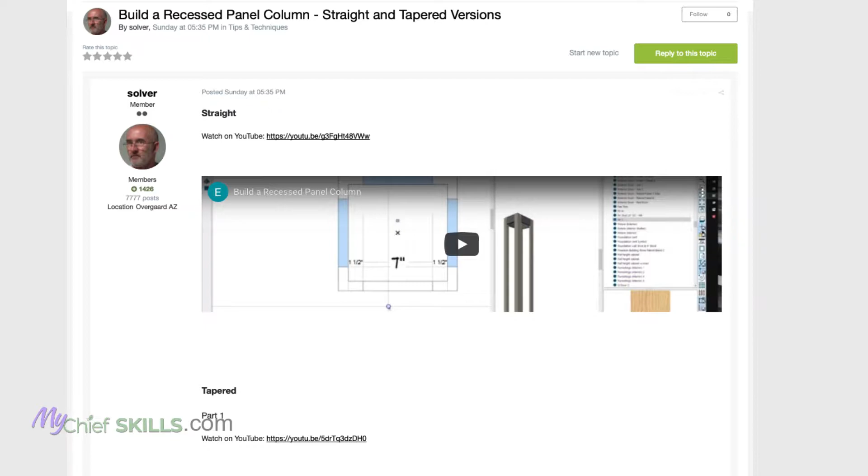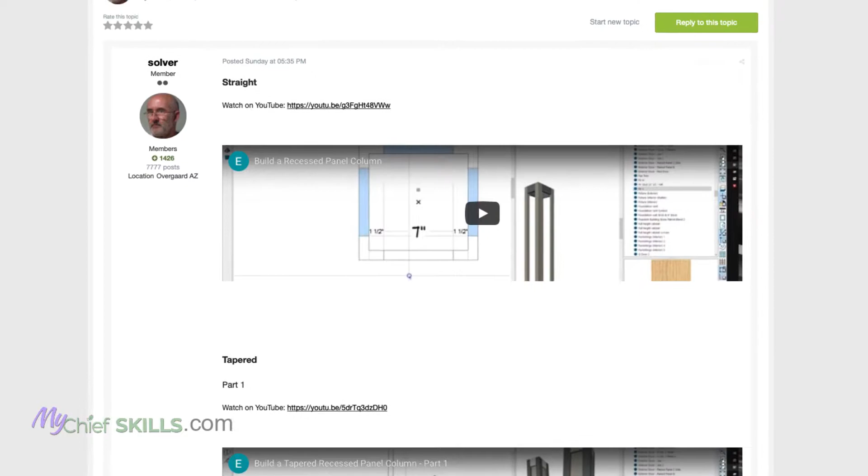Hey, this is Steve at Chiefskills, and I'm going to piggyback off what Eric has done here. He posted recent videos on Chief Talk about building a recessed panel column using solids and different modeling techniques, creating tapered columns with trim boards. It was well explained, but I thought there's got to be an easier way. So I'm going to show you a different technique using a symbol that gets to the same end result, but a little different, and I think a little quicker. Let's take a look, and you can be the judge.

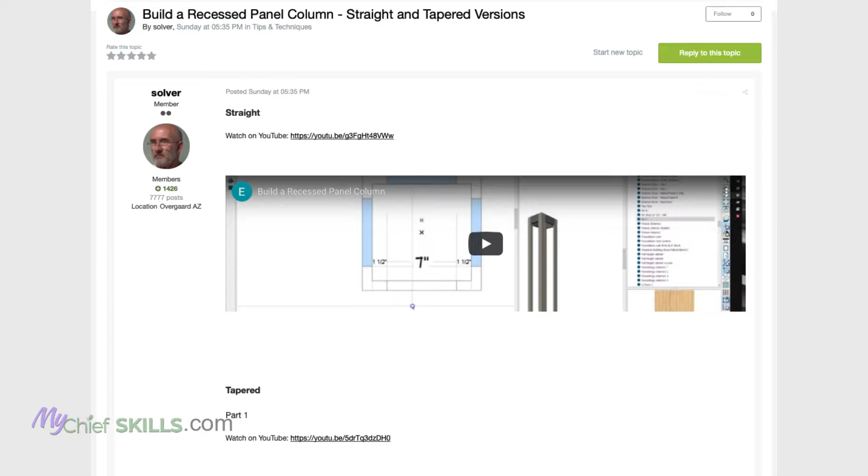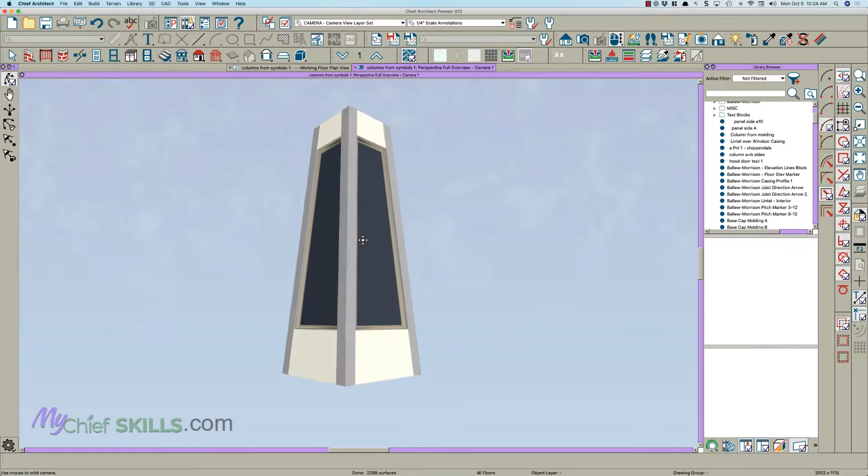Hey there, everybody, it's Steve at Chiefskills, and today I'm going to show you how to make this column using just two symbols, basically made from polyline solids and a molding polyline. It's a fast way to make a tapered panel column, and it works great, looks great, and gives you lots of flexibility. So let's get started and I'll show you how to do it.

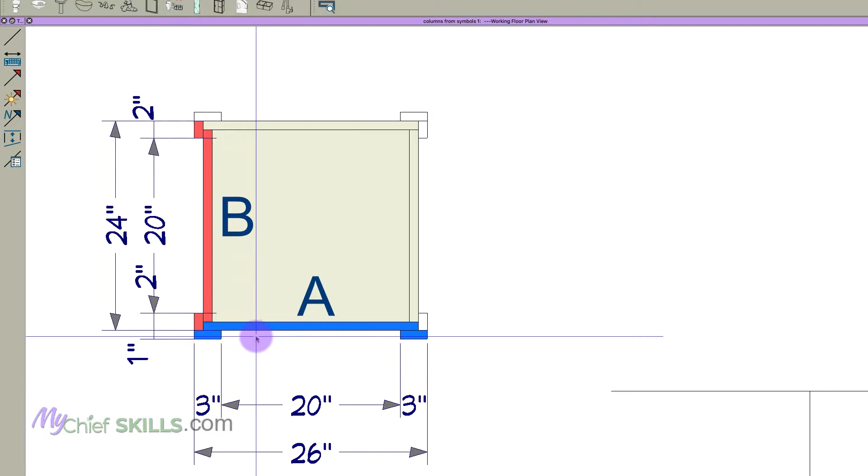First we need to understand how this is going to be built. This area colored in light green is 2 foot square, and that's the base of our column. But to get the trim to line up, we need a panel that's 24 inches, and the trim extends beyond that by 1 inch, making it overall 26. That's panel A. For panel B, the trim is only 2 inches wide, so 2 plus 1 is 3, making it look like 3 inches all the way around, and this panel is only 24 inches wide. With those two panels, we can make the column.

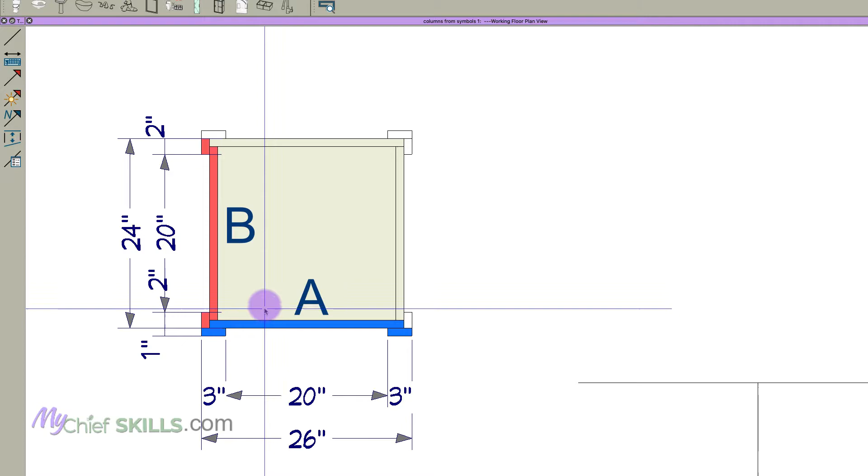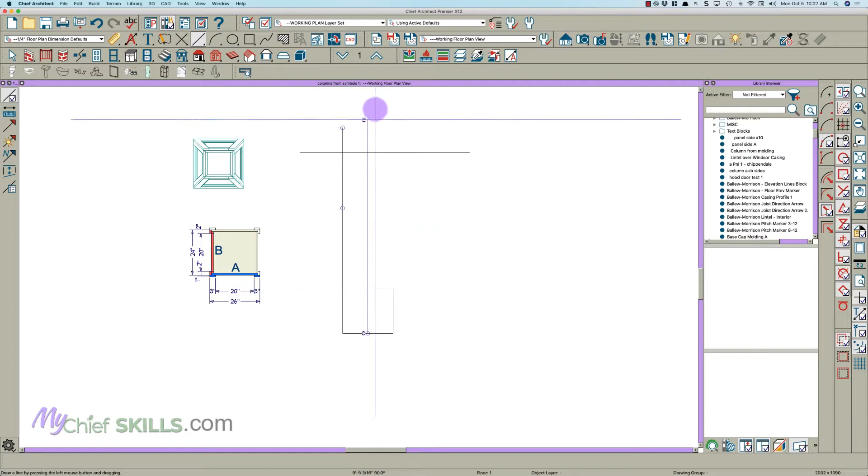I've set up a drawing here, and this is 6 feet tall for our column. This little polyline is 2 foot 2, which is 26 inches. First I'll draw a line here, and another line off the center of this polyline. Then on this line, I'll open it and change the angle to 86 degrees, which is our side angle of the column. Then I'll copy that and reflect it about this center, and that's our basic shape.

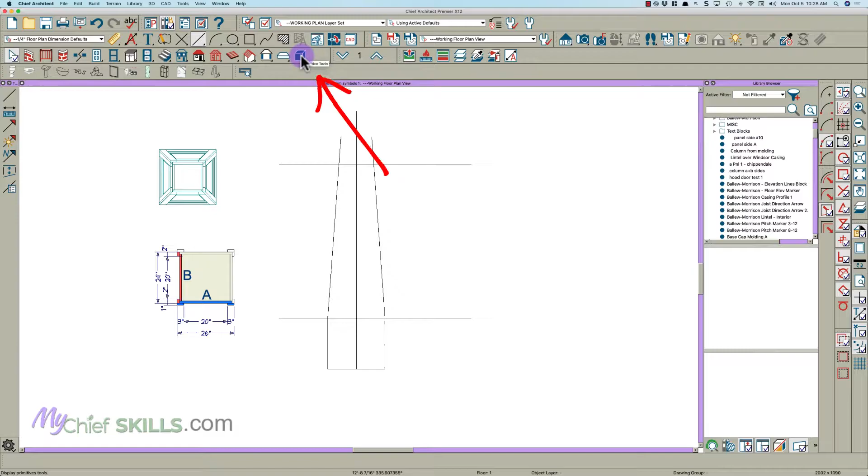Then I'll get this solids tool, the primitive tool, and use a slab basically, draw this and pull it in like that. If you double click on it, you can see it's 1 inch thick and the bottom is at 0, and that is this panel right there.

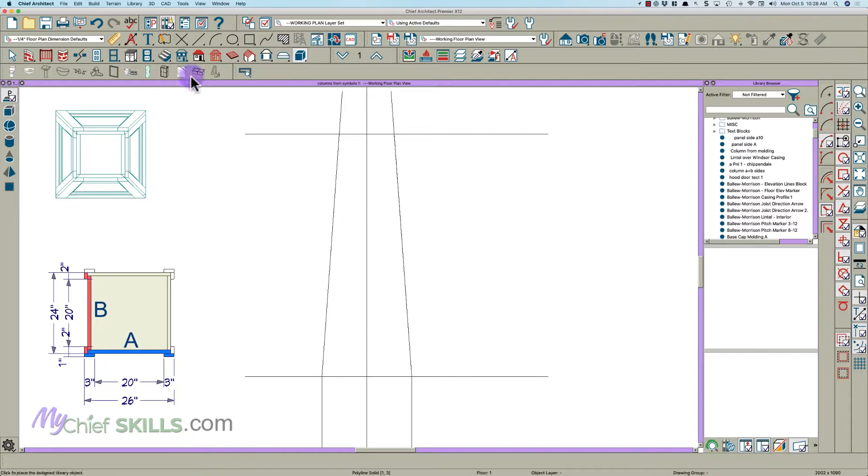That's what we're making. Next I'll make the trim pieces using the same slab tool. I'll click right here, and I'm actually going to extend it a little bit, saying 3 inches, like that.

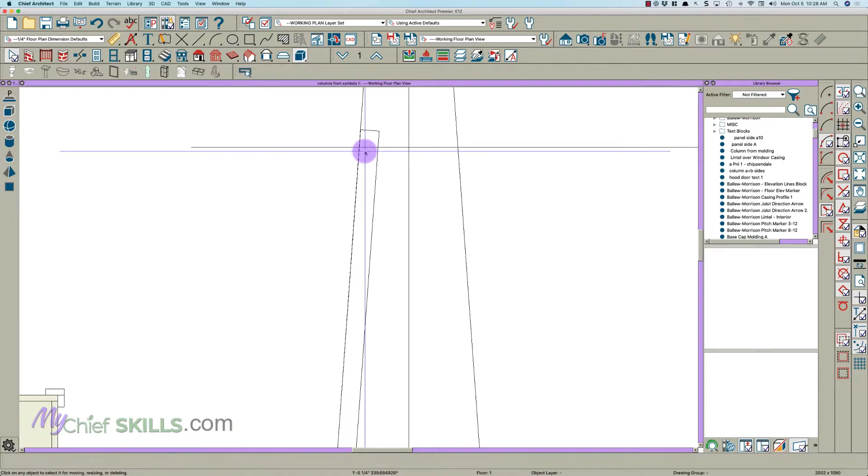Then I'll double click this little parallel tool and rotate the entire polyline, picking up this line. Then I'll pick up this corner and snap it right there, pull this down, turn my temporary dimensions off for a second, and snap to the nearest corner, then pull this one down. Then I'll do the same here, snapping to this nearest corner and pulling this up.

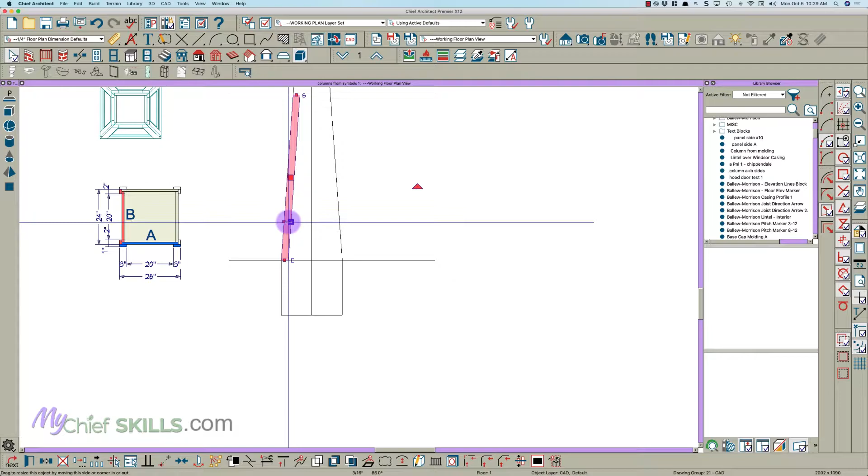Then, very simply, I'll open this and make sure the bottom of this piece is at 1, so it sits on top of this piece. Then I'll click it, copy it, and reflect it about right there.

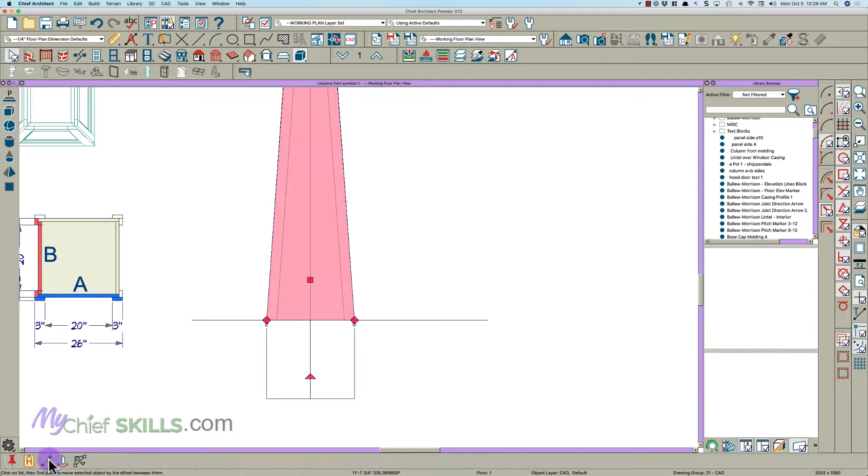Then we need to make these base pieces. I'm going to copy this big panel and paste, hold position. Then open that while it's still selected and raise it so the bottom is at 1. I'm just going to pull this down like this, turn on my temporary dimensions, and make this 12 inches. You can be as specific as you want with your dimensions. I'm just making this so it looks halfway decent.

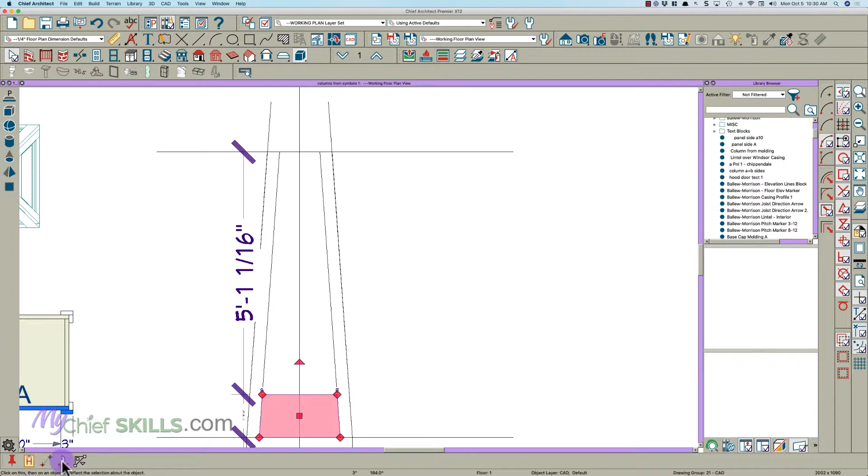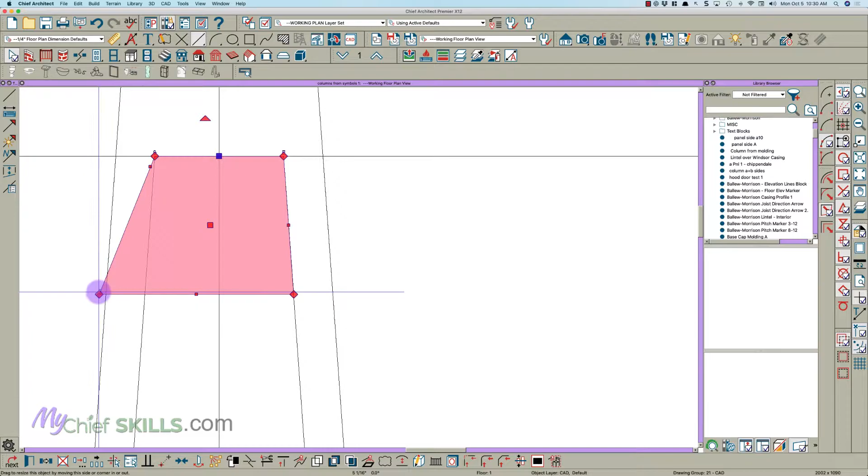Then I'm going to copy this and reflect it about. Oh, I need a line, so I'm going to draw a line right here in the middle. Copy and reflect about right there. And then just manipulate this and pull it together right there. I'm going to turn my temporary dimensions off. And there you have it.

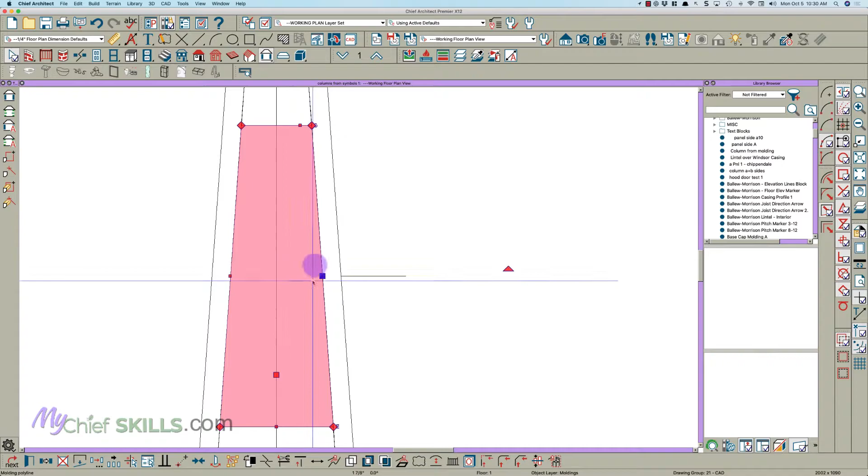Now the only thing we're missing is this molding in the middle, and for that I'm going to use a molding polyline. This is the number one reason why I like to draw these things in plan view, because this molding polyline tool is so much easier to use than the 3D molding polyline. So I'm going to open that and make sure it's set at 1 inch so it's sitting on the surface of our main panel.

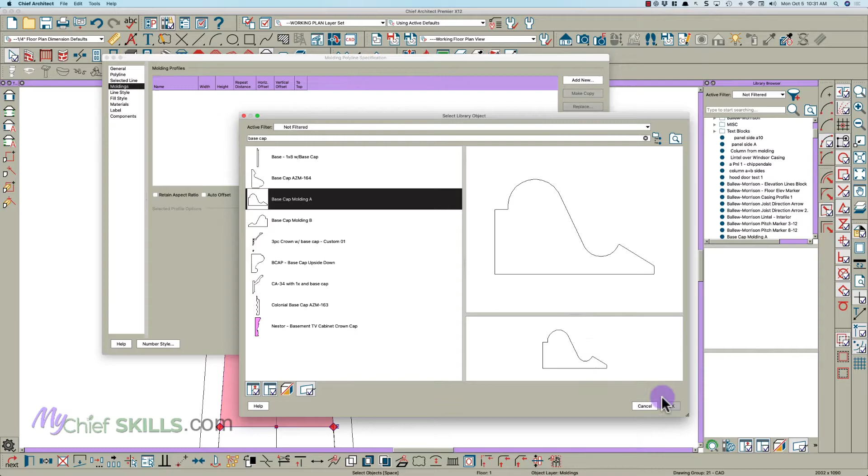Then add new, and I'm going to choose a base cap. I know I have this in here because I've done this before, but I have the basic base cap and I've made copies of it so it's laying in different directions. This is the one I want so that the back edge is against this, and extrude inside is what I want. So there's our first panel A, let's just take a look at it.

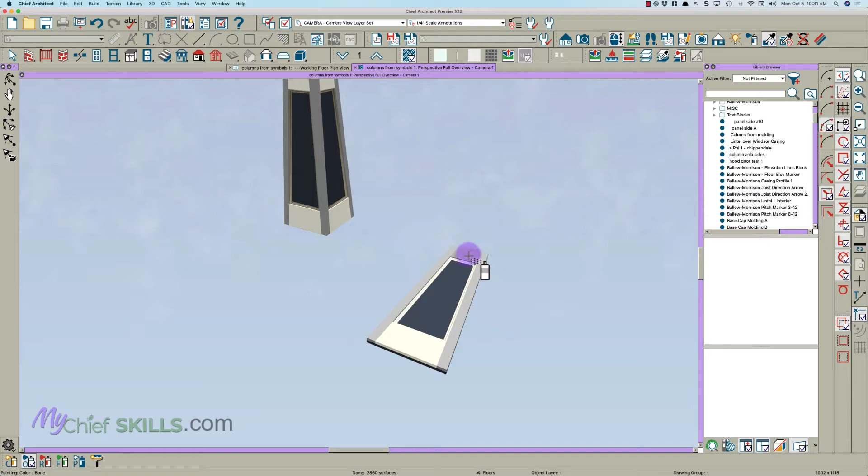It's all these concrete materials, so we're just going to paint them in different colors so you have some ability to change the texture of all these things, especially these 4 pieces right here. If you paint everything a different color, it gives you flexibility later on when you're placing this symbol in your plan. So there's our panel.

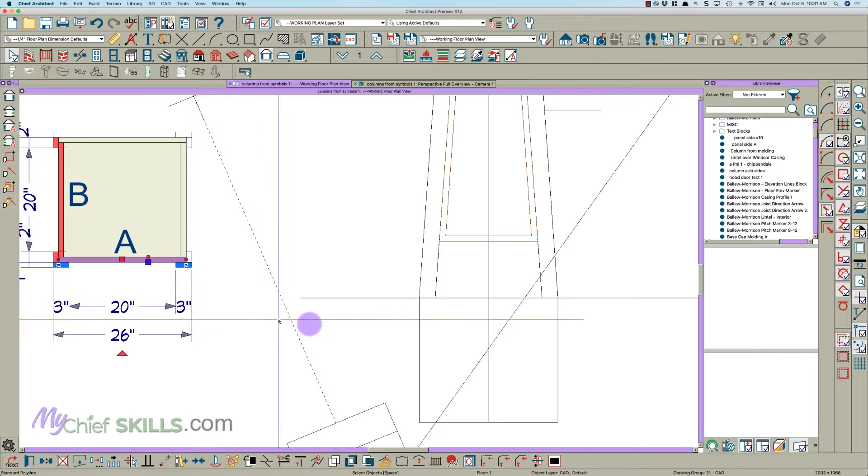Now there's one more little thing we have to do to it, and that is the panel itself right here is only 24. So I'm actually going to change the length of this to 24 and center it on the main panel here. Then I'm going to click here and get this main panel, turn my temporary dimensions off, and snap it right to that corner and right to that corner right there. And that is our first panel, side A.

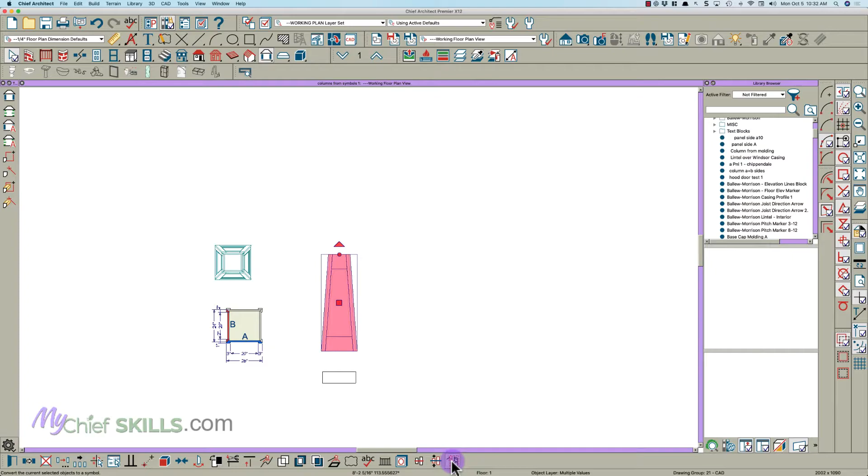I'm going to get rid of this camera, get rid of these polylines, we don't need them anymore. Then select this and hit the little chair stool right here, and panel side A, I'm going to put 100 because I've made a few of these testing things. Make sure it's a fixture exterior and say OK.

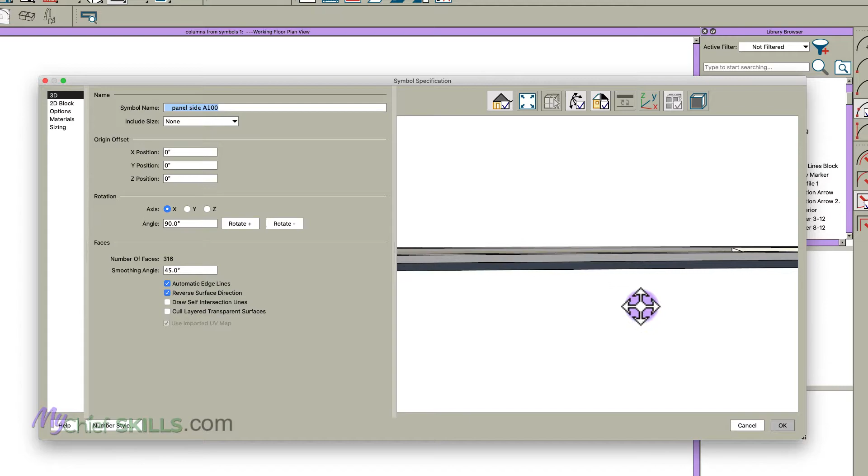And here's the secret to this whole thing: we have to rotate this. It's sitting flat on the floor right now in plan view. We need to stand it up, and we're going to stand it up 90 degrees just like the sides we made. If you look at that now, you'll see that it is standing and leaning, which is what we want.

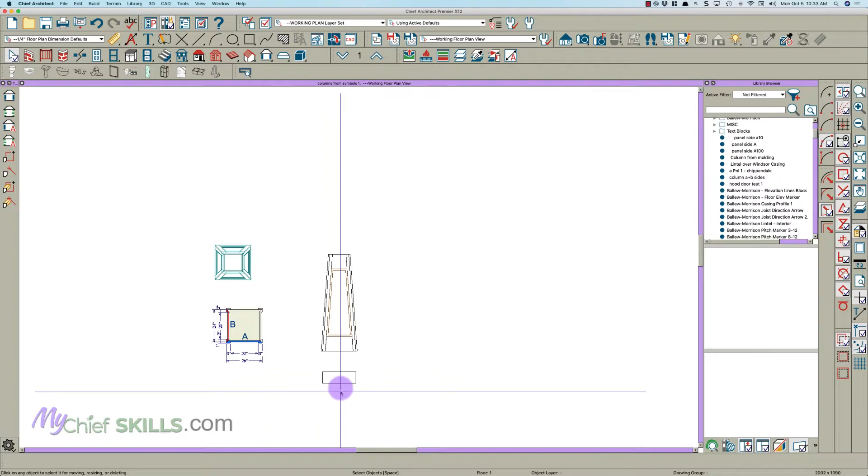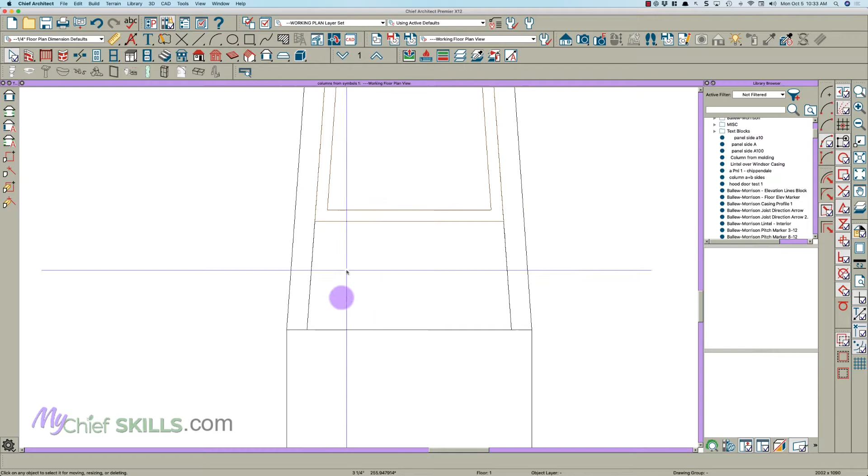Click OK. All right, now we need to make panel side B, and panel side B is just this dimension. It's actually 24 inches to the trim, okay, which is what this polyline is. So what we're going to do is take this trim piece right here and just pull it back until it snaps right there.

The only other modification we need to make is we're going to make this 22 inches and center it on the main panel. Then click our main panel and snap it to those corners. I've turned my temporary dimensions off so I can do this, and snap it there. And then that panel is ready, that's panel side B. So let's select this.

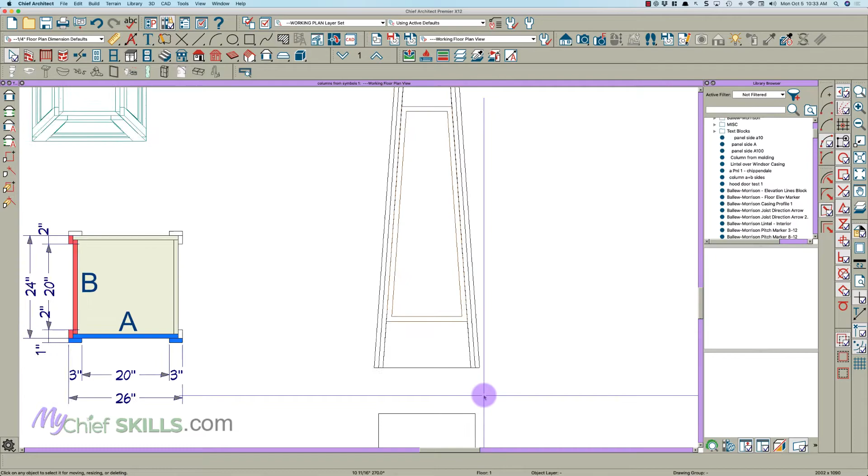Open this and panel side B100. Panel side. Okay.

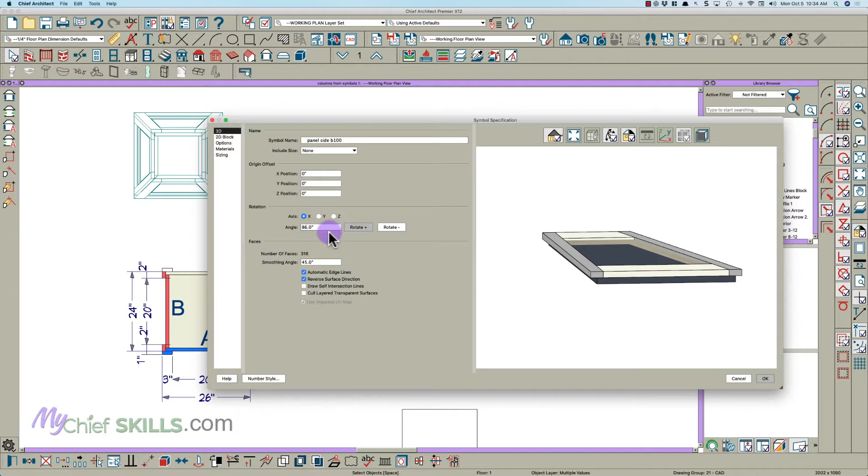And again, we have to rotate it 90 degrees on the x-axis. And that's all we need to do. Now we have A and B, so we can make our column.

So we're going to pull in panel side A 100 and rotate that around this way. And then panel side B, rotate it around vertical.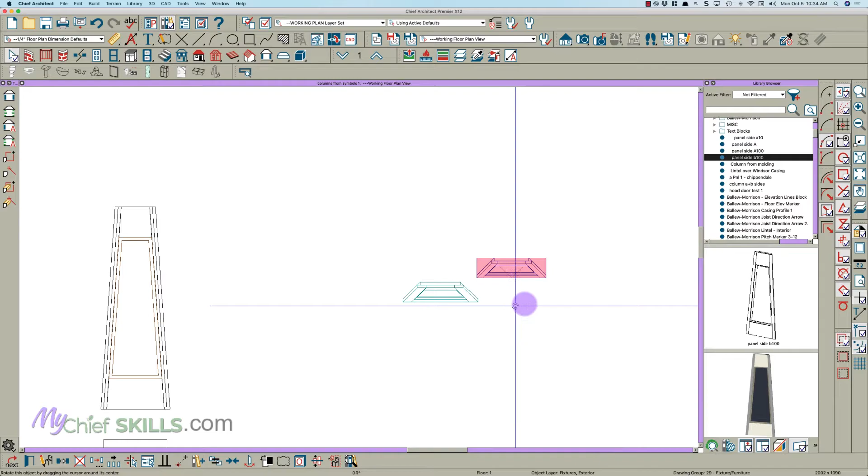And we need to snap these together, but how do you do that? Because you can't really do it like this. So I am going to...

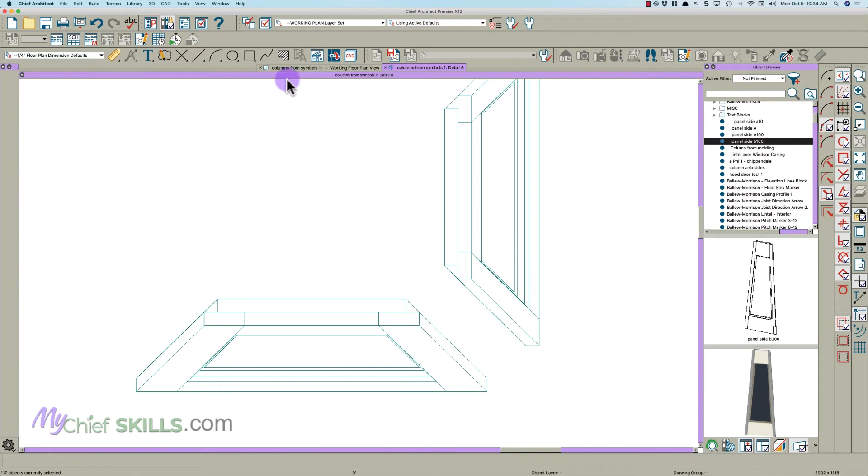Do a CAD detail from view, and then explode these 2 blocks. And then I like to use this point tool, and what we want to do is we want this corner to sit right there into this corner. So I'm going to put one there and one here.

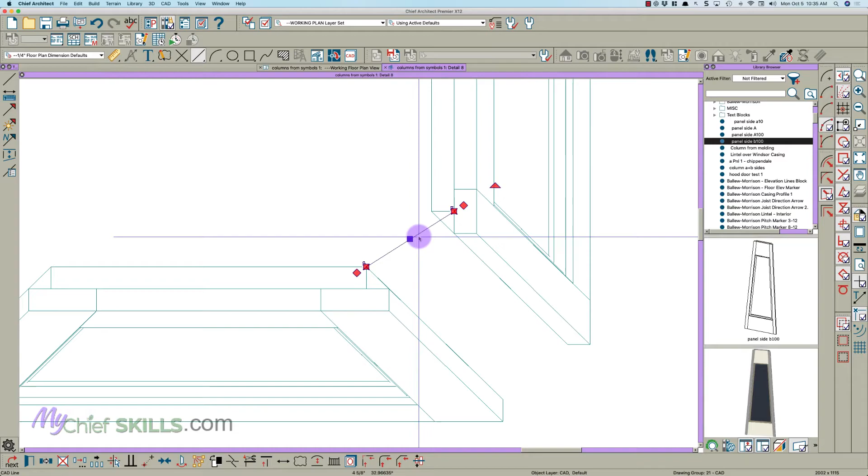Then I'm going to draw a line between the two, if I can get it to snap right there. Go Control C, go back to the floor plan, Control Alt V. Now we have snap points, and we can move it with point to point right there.

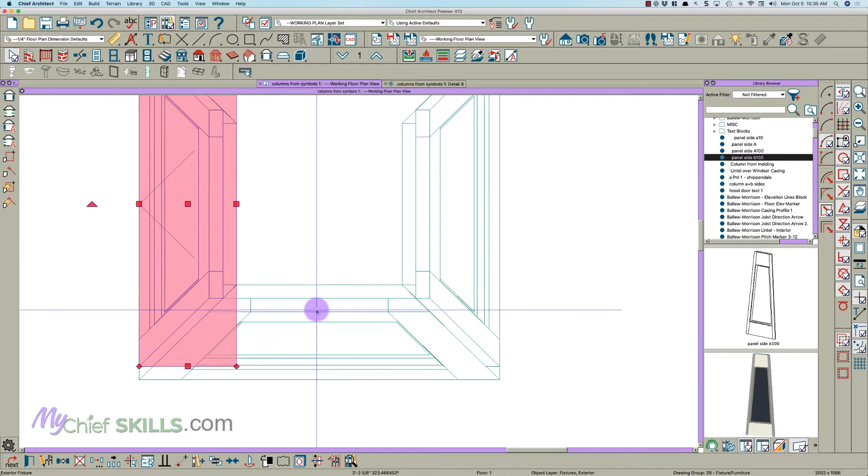And we can get rid of this line. And then we just copy this and reflect it about. And we copy this and reflect it about.

There's actually another way you can join these columns without using that point-to-point method, and I wanted to show you that. So let's pull in side A and pull in side B, and then just make a polyline right here and make it 26 inches square, 26 by 26 right here.

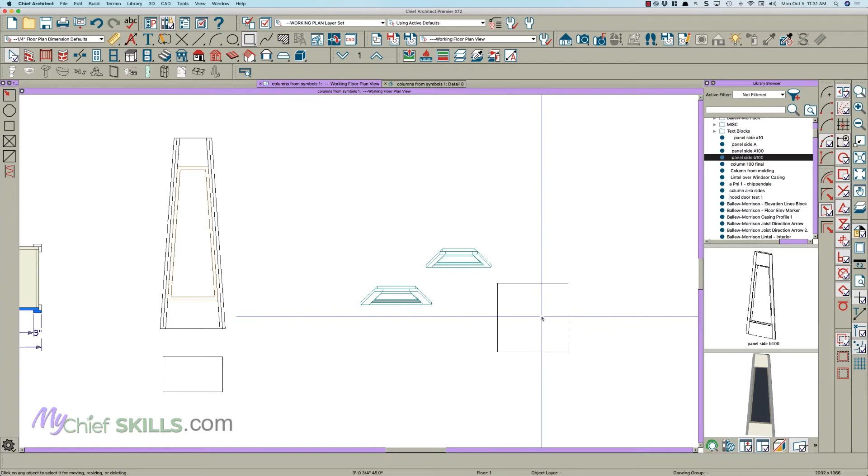Come on, hit enter. And then what we can do is take this, hit Control G, and center it right here. Then use point to point and pull this one right here down to there. And then let's just rotate this and use point to point and put it right here in the middle.

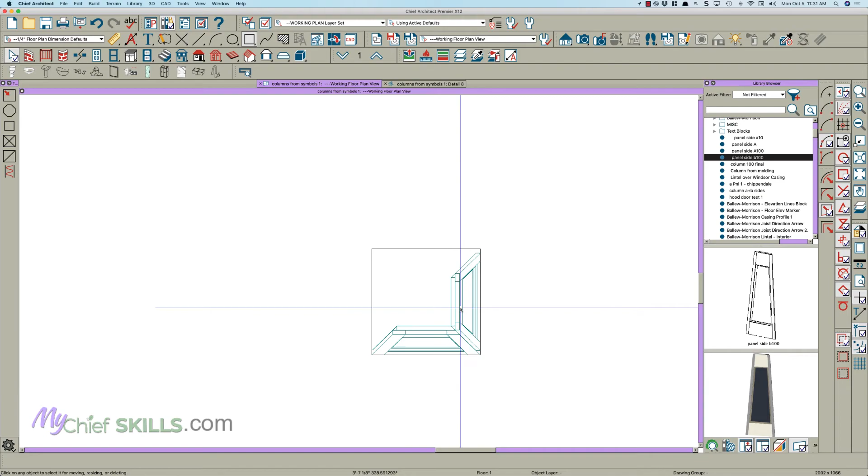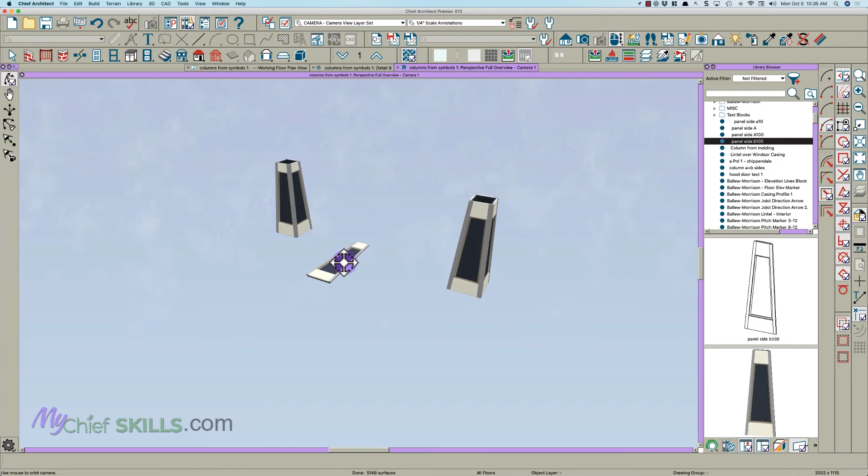And then just copy and reflect about right here, and copy and reflect about right here. And since we just put them right here to our 26 by 26, we will have our column right here. And then we take a look and we should have a column, and we do right here. All done, paneled tapered column.

Easy peasy, as they would say. And then if you want to make a column, you just click these 4 sections.

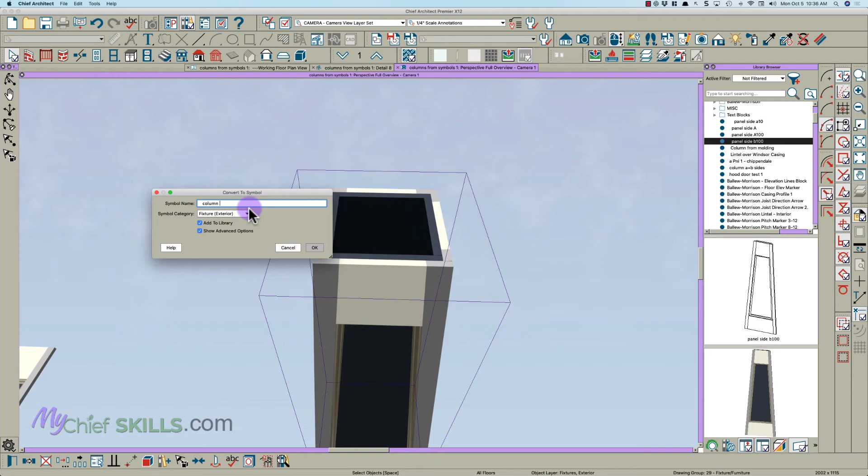Grab this little stool symbol and make a symbol, and let's call it column 100 final. And making it a fixture exterior, and then go here.

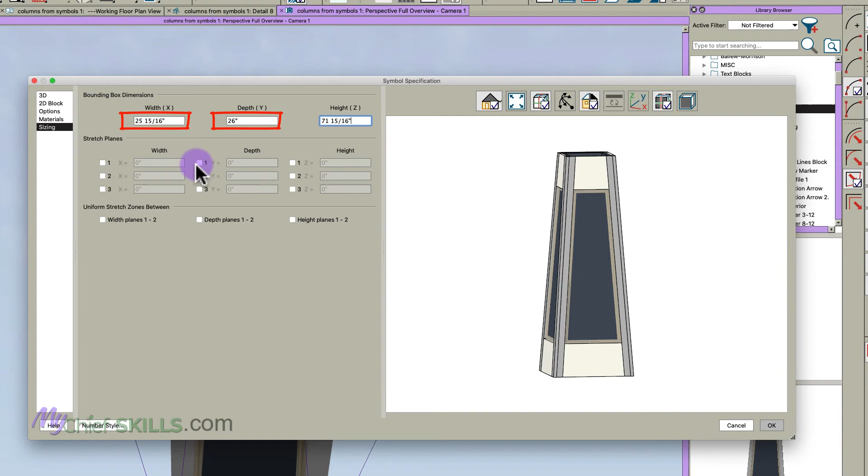And really the only thing we need to mess with is the sizing. And as you can see, it's a 1/16 of an inch off from square, and just slightly off on the height. I don't know, it's an anomaly in Chief. I'm not sure why it happens, but we'll just click there and make that 0, which you can see where that would be. Here we'll go -13.

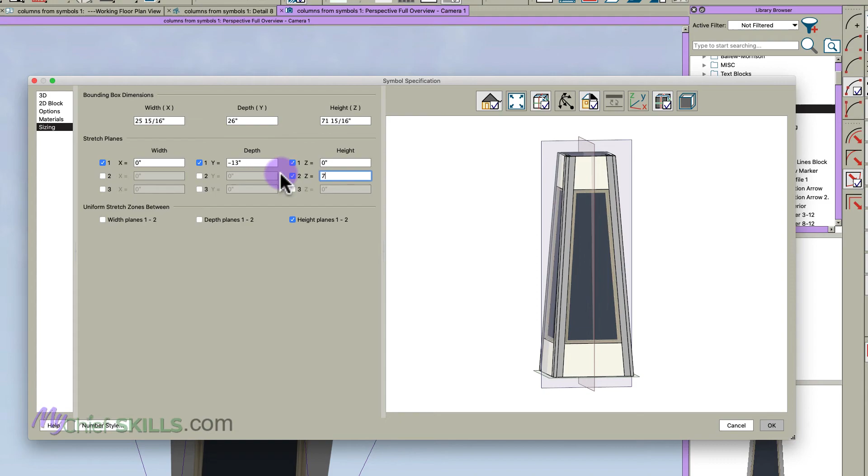And then on the height, we're going to have equal height planes from 0 to 72, say. Okay, and then we will have our symbol panel column, and we can place that wherever we want.

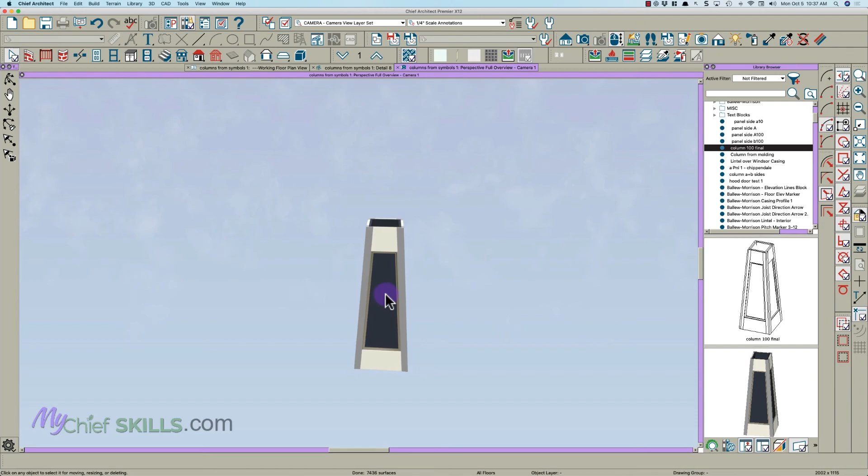Let's place it over here. Let's turn this around so it's facing that. And just look at this, and there you go. That's a symbol, and we can stretch it and make it look right.

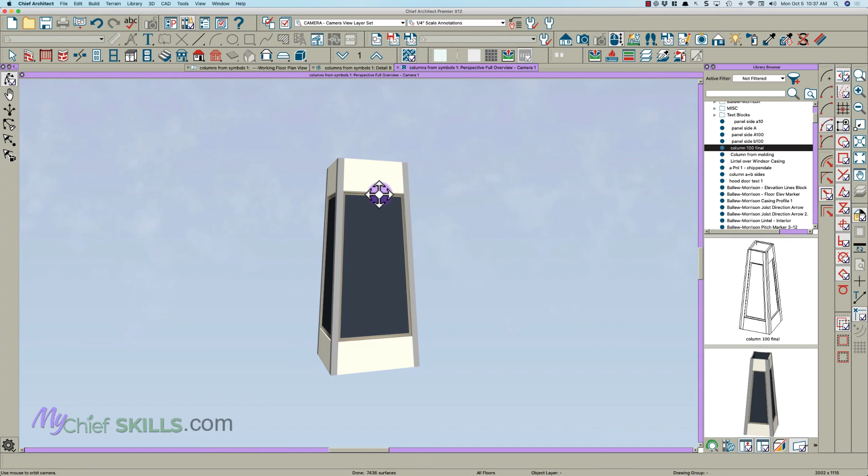It does distort the top and bottom, but I've experimented, and that's about all you can really hope for. But you can stretch it in all 4 views, like you can make it bigger this way, make it bigger this way, and it stays, the trim pieces stay the same. It's a fast way to make a tapered panel column.

And you can make as many panels as you want, make it as interesting as you want. And making a symbol in plan view is the way to go if you can figure out the rotation.

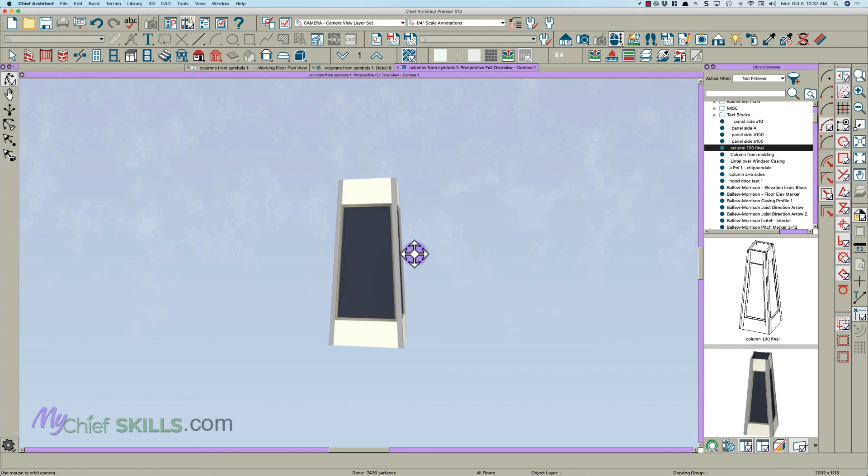So hope this little video helps. Thanks for watching, we'll see you next time.